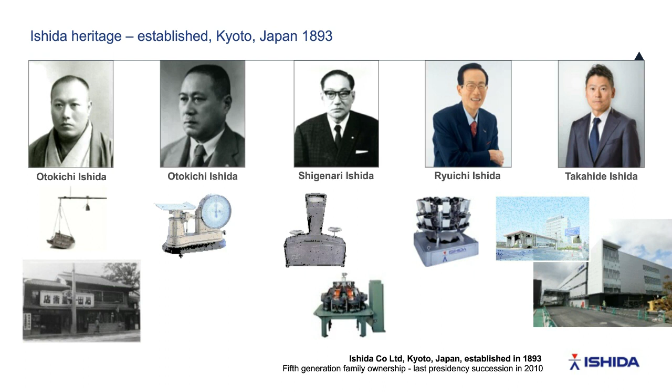Moving on, considering our presence in Europe, Ishida Europe was formed in 1985 as a hub for the Ishida business in Europe, the Middle East and Africa. We've also progressed into manufacture, and since 1995, about 60% of the machines sold by Ishida Europe within the EMEA region are manufactured in Birmingham in the UK. Just to show the size of the organization, in March 2019, we had 612 staff across the EMEA region.

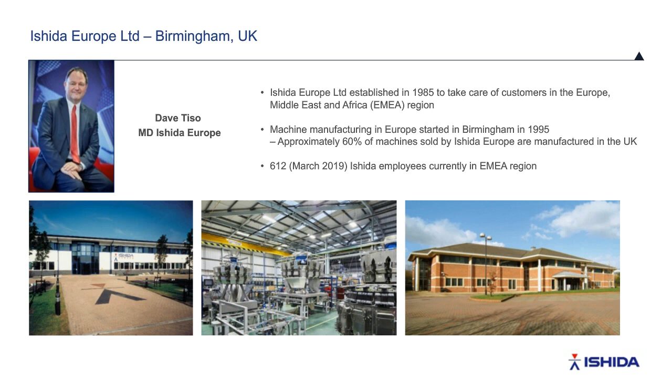Having provided a very quick overview of the company, let's start to talk about the key themes of today. In the confectionery sector, it's now highly industrialized, and there are demands for higher speeds, higher efficiencies, and higher accuracies. My colleagues will talk about a variety of concepts around that as we move forward. Clearly, all of those involved want to make sure their giveaway is reduced, they're extracting the maximum product throughput from any factory footprint, ensuring their plants are providing weight compliance, and key is food safety as we move forward, so we need to ensure there's no contamination within the finished product.

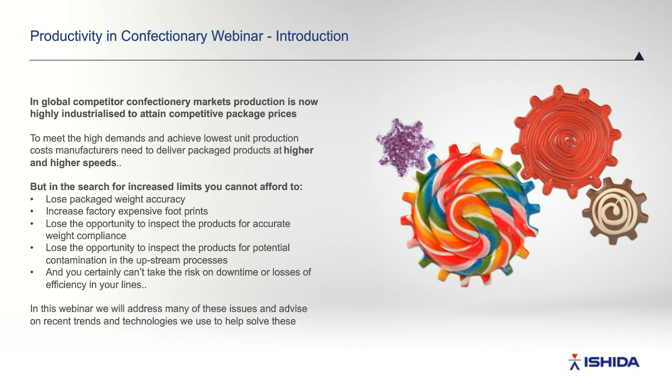Thank you, Steve. Good morning, everyone. My name is Ian Atkinson, and I'm Business Manager for Multihead Weighers here at Ishida. What this means in the Ishida language is I live and breathe the multi-head weighing applications, the customer challenges that you face, and of course the solutions that we devise for you.

During my section, I'm going to talk to you about industrial weighing in some of the more challenging confectionery applications. It's only a short slot, so I would welcome you to engage with us after the event if we want to go into more specifics, especially around your challenges.

As Steve said, we developed the first multi-head weigher back in the early 1970s, but since then we've continuously invested in our designs and technology. While we've expanded our range to over 500 models now, always increasing speeds and giving you more configurations for more different challenges, the one thing we've never lost focus on is our accuracy. And that brings us to our theme for today, which is high productivity without compromising.

We deal with many different applications across our company worldwide—fresh, frozen, and dry sectors across Ishida—and all of the challenges and product characteristics involved can actually be seen in confectionery.

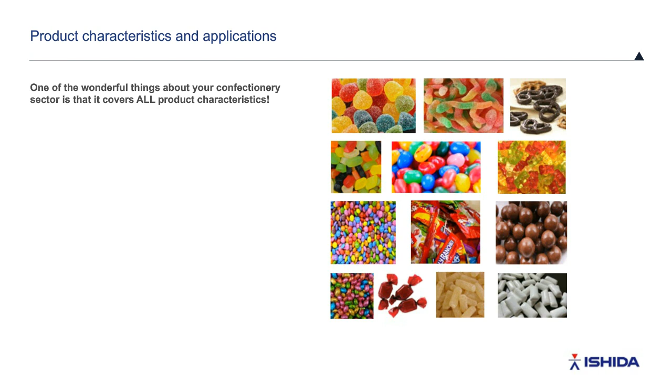One of the wonderful things about your sector is you've got just about every challenge we face. As you can see in the images, there's an example of sugared confectionery—sugar is a challenge with abrasion and potentially getting into seals, something we need to manage together. You've also got examples of tangling products.

You've got examples of fragile chocolate-coated products. The chocolate coating can also be an issue when ambient temperatures change, which will change the flow characteristics.

You've got free-flowing confectionery, oiled, sticky jelly confectionery which can be clumpy as it arrives at the top of the machine, and even products in bag.

We may provide a solution with accurate combination weighing, with small micro packs going into packs, then transferred around to another weigher which weighs those mini packs into a bag—effectively becoming its own product in its own right.

You've got the example of the chocolate balls—they're very, very free-flowing. The challenge there is actually to slow them down so you can control them.

Then you've got the example of the coloured wrapped candies, which could be an example of mixed weighing, where you may want to mix guaranteed percentages of colours within the consumer's pack.

You've also got examples of wrapped candies—that could be an example of low piece counts, or even single piece counts with guaranteed single piece counts, which is another solution we can provide.

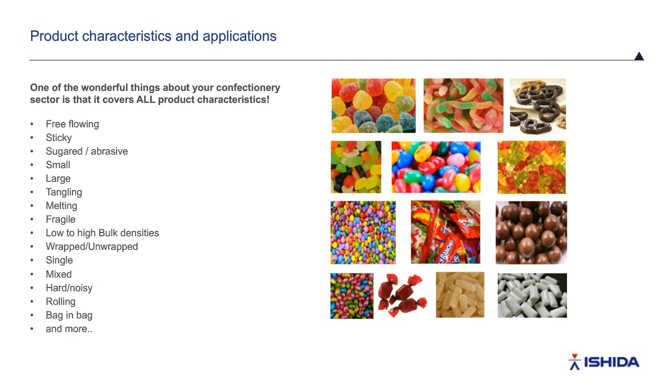In order to ensure we can tune our industrial weighing solution to exactly match your needs, we need to spend time to really understand your business.

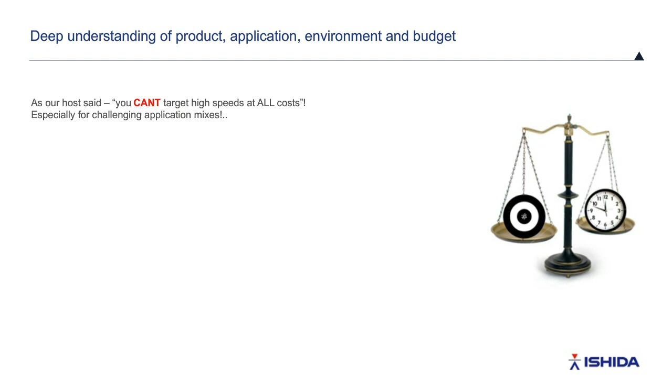As our host Steve said, you can't target high speeds at all costs, especially for challenging application mixes. So all of our Ishida sales consultants and engineers actually spend a huge amount of time with you up front before just arriving and trying to give you a quote. We won't arrive with a quote, we won't arrive just trying to compete on price—we will actually want to deeply understand your business.

We've already touched on product characteristics, but it's worth mentioning we need to understand not just what the products are like in pack, in the supermarket environment, but also exactly how they arrive at the top of the industrial weigher in your exact production condition.

What are the different target weights and speeds? More specifically, we need to understand exactly the speed requirement you need for each target weight of that product—not just a generic speed. We really want to understand it deeply.

Within that range, we also want to understand what's the highest percentage of your production, so that we can have a level of prioritization in devising our solution.

Of course, it's very rare you're only doing one product. The likelihood is you'll be doing many, many products on your industrial weighers, whether you're a small, medium or large manufacturer, or a contract packer for the large supermarket chains.

Based on the multiple products, we'd want to understand with you what's the highest percentage of production so we can prioritize. Also, what are your future plans in years to come? Because we'd expect with an Ishida machine that you should be running it for at least 15 plus years.

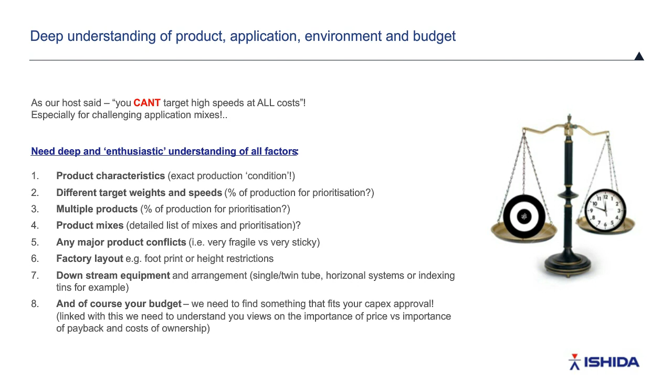Now, what I'd like to do is move on to the confectionery weighing challenges. So I've got a selection of really high-end challenges. I'd like to share these high-performance examples with you.

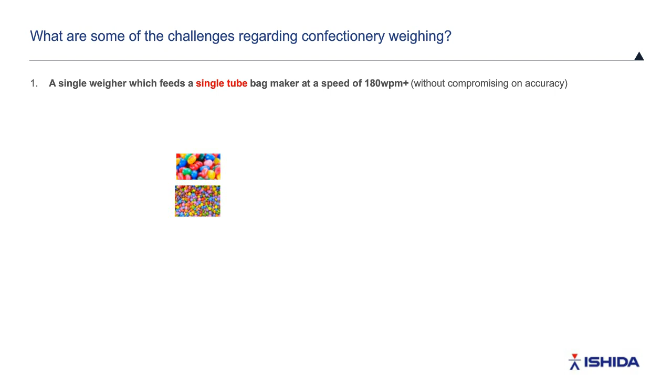So the first one I'd like to look at is how do you solve really high-speed, accurate weighing into a single tube vertical bag maker with up to 180, perhaps even plus weighs per minute. We would typically have two options to consider with you. The first option is to split a machine into effectively 2 combination weighers feeding each side of a high-speed Ishida single twin timing hopper. This could be a mid-range machine because we're spreading the combination weights across each side of the weigher.

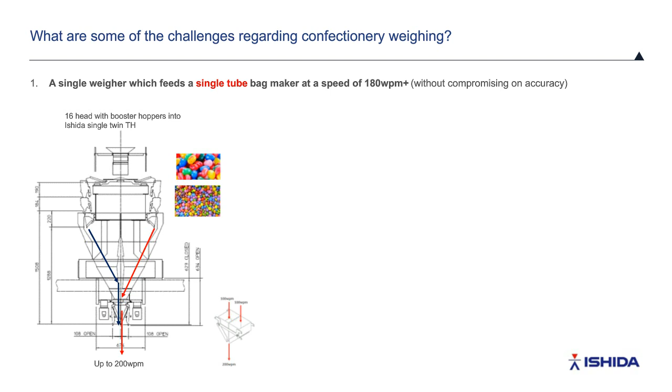Each side would make a combination very accurately, dropping that charge of product into one side of the single twin timing hopper, slightly out of phase with the other side. So there's a very short drop distance and drop time between each transition into each side of that high-speed timing hopper. With this configuration, you could have up to 200 weighs per minute going into a very high-speed vertical bag maker below.

The alternative, particularly if you have more compact factory spaces, is to have one of our premium top-of-the-range machine solutions running at very high speeds, a 14-head machine making combinations from those 14 heads, typically dropping from 4 weigh hoppers, straight into a high-speed chute and down through an Ishida Iris timing hopper, which opens very quickly. This can run up to 180 weighs per minute. We supply both of these solutions into really high-end, high-speed single-tube applications.

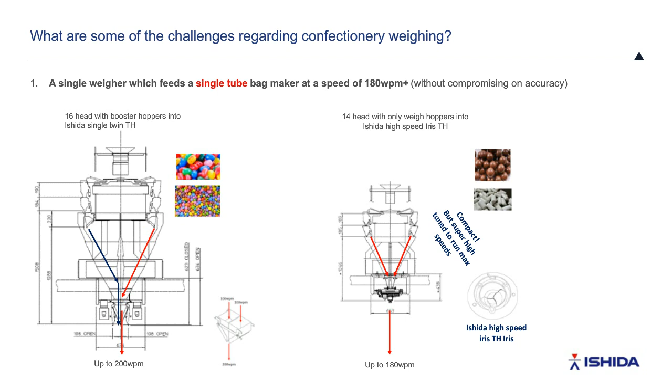So another challenge is to look at how can we provide a solution for very high speed into twin-tube vertical bag makers? In this case, up to 400 weighs per minute, again, without compromising on weighing accuracy.

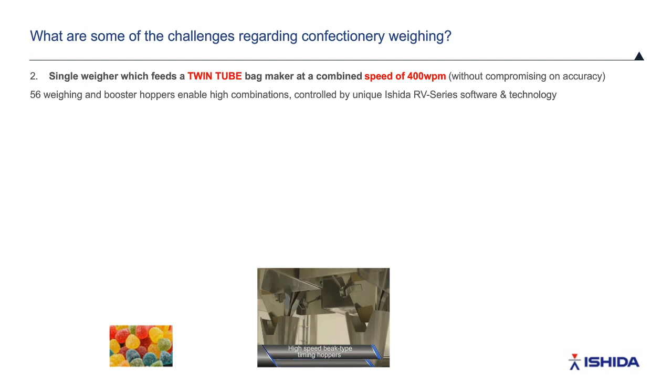Our solution would be to provide a 28-head machine split into 4 sections. Because it's split into different sections, this machine would also have booster hoppers to aid in providing you with the maximum number of combinations, so not compromising on accuracy.

So we consider how can we optimize the flight of that product. This configuration is super high speed. It goes from pool hopper, weigh hopper, booster hopper, single opening, and we direct the product down a high-speed chute so it barely touches the side. There's no swirling, no bounce, and it's transferred in the optimum style and shape.

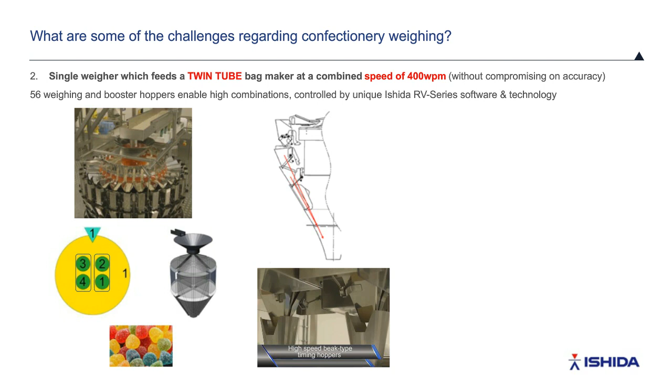As you can see, this then delivers up to 100 weighs per minute per section, going into each side of the high-speed single twin timing hopper, delivering you up to 200 weighs per minute per tube. And we have got successful installations delivering product accurately weighed at these very high speeds.

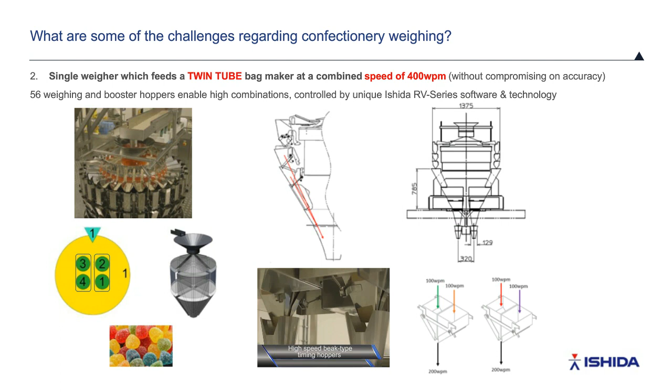So how do we weigh at high speeds without breaking fragile products? Another one of the challenges and paradoxes that we have to face. So with very fragile confectionery products, we need to still give you a productive throughput, but avoid that product breakage so that your consumers open that pack and can recognize that product, not just end up with broken pieces.

What we do is we consider every transition point through the weigher, and it starts right at the top. We have a low drop height, specially designed low height inlet chute, dropping onto a dispersion table at the top, which is actually coated in urethane coating, providing a cushioning benefit to avoid breakage at that first transition.

That then vibrates in a controlled fashion, feeding product onto individual radial feeders, which are cleverly shaped to minimize breakage. They also have liners on there, and then a waterfall end which gently trickles that product into the pool hopper.

We can offer this either in our entry or mid-range level, but in our premium range we also offer special curved hoppers which specifically control the deceleration of the product as it transitions into each hopper.

Those double opening curved hoppers then transfer from the pool hopper, the weigh hopper, down into a very shallow discharge chute, again which is lined.

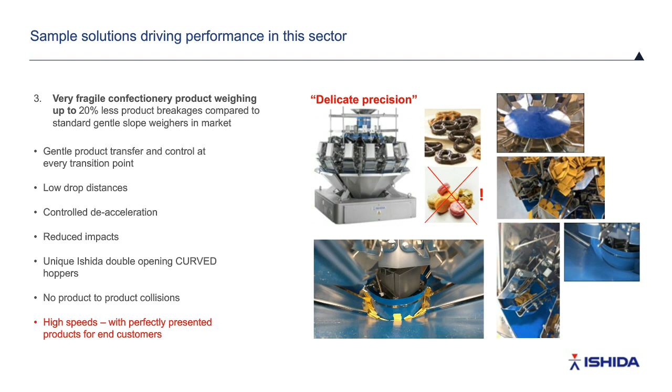So how do we overcome the mixing challenge, now a common theme and a common requirement in confectionery?

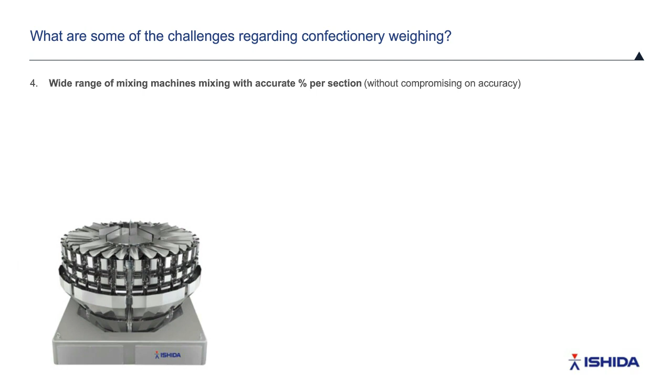We can offer you mixes of 2 mix right up to 8 mix with very accurate guaranteed percentages per section. When mixing, each section is working as an independent weigher, so you have to have the number of heads available and the configuration and design available for each of the product characteristics in each of those sections.

Our focus is always to deliver the best combination weighing, and so we can actually have many different section splits across our mid-range or our premium range solutions.

As we have 500 models available, we can also select, match, and specifically tune to your different requirements and application needs. Here's an example of a 2-mix machine split evenly based on products with similar characteristics.

We could then have a 3-mix, and in this case, section 1 has more heads than section 2 and 3. So that, for example, may be applied to a more challenging product where it's more difficult to make quick combinations.

Here's another 3-mix where you may have 3 similar characteristics of the product, and this allows for that combination and an equal distribution.

4-mix, 5-mix, again with different head splits. This is just to show you an example. 6-mix, and then moving all the way up to 8-mix with our 32 head.

Typically, we would say a minimum number of heads per section is 4 heads per section, again with a booster hopper to enable you to make the required number of combinations.

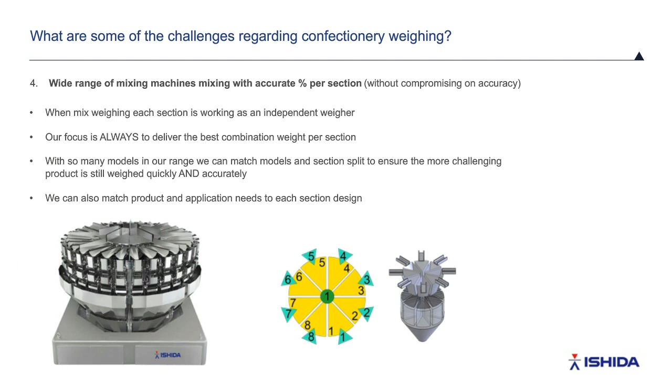Now, last but not least, I wanted to highlight something particularly in vogue in the confectionery industry, and something we've seen a lot in recent years, and this is the sugar challenge, something we've been very much working on for the last 12 months.

Now, sugared product is a challenge. It's abrasive. As the product is transferred, it's energized, and that loosens the sugar from the product, and it then is traveling down through the machine.

Excess sugar around the product then risks contaminating the packaging seal, so not good - pinholes in the seal, air leakage, and of course potentially spoiling of the product.

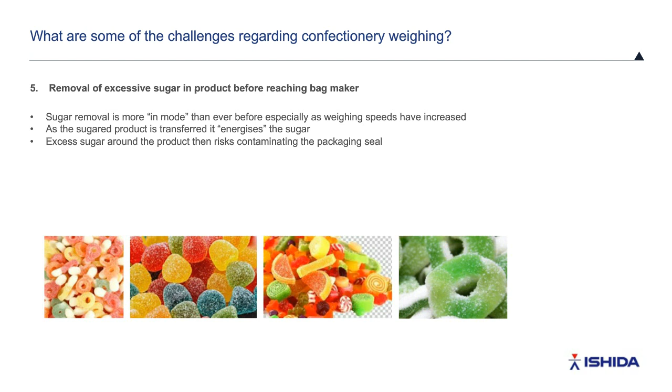Now, Ishida has added to our sugar extraction solutions, and we have an all-new on-machine extraction design, which greatly reduces sugar removal before being weighed. We've been busy over the last 12 months testing this, and we're delighted with the results.

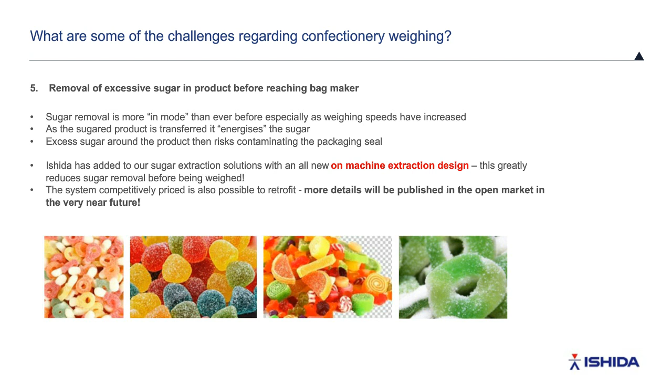All I wanted to do today is just highlight this is now in existence, and we will be launching this to the open market in the very near future. So if you have weighing applications of sugared product, we look forward to talking to you and discussing our solution, which is

actually also very competitive and cost effective in the market. So apologies, I've just gone back a slide.

So just to close, from a weighing perspective, I just wanted to emphasize again that our focus is always on delivering maximum accuracy and yields, but as well as productivity.

So we never lose focus of the need to provide combination weighing, which is our true specialty.

We don't get into dosing. We're the world's specialists in combination weighing. Dosing for us is actually a compromise.

So the things we've just discussed are really just a few, and certainly we do want to get into more specifics with you, so please do contact us.

Our broad range of approximately 500 different multi-head variants can be adapted further to tune our solution for you. So 500 models, up to 150 different options per model.

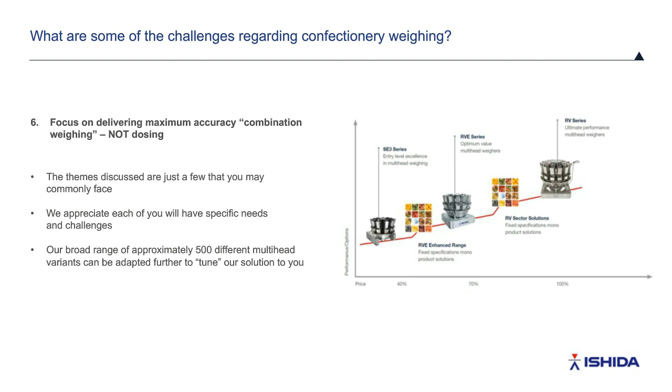We ensure you receive rapid payback and years of low-cost operations with the highest possible yields. Challenge us as the market leader in your production challenge. We'd love to listen to you, and we'd love to combine our knowledge with yours. And we look forward to having more contact with you. Thank you for taking the time to listen.

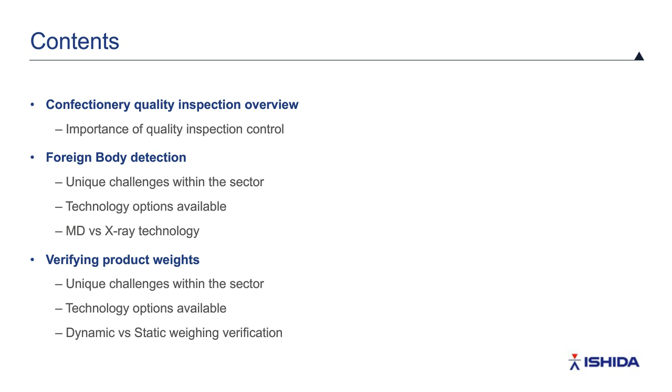So first up, as a confectionery producer, why would I be interested in investing in quality inspection control equipment? Well, one of the foremost, probably front and center, is brand protection. Brand is very important in differentiating yourself in the market, and it can also be damaged very rapidly.

If we go back 15, 20 years, if there was a particular quality issue with a customer, you might end up with a customer complaint coming back, and it might influence the friends and colleagues of that individual not to purchase your brand going forward. Nowadays, with the rise of social media, any particular quality issue with a brand can be spread very, very quickly.

So it's very easy to damage brands in the market when you have a quality issue. Also, a very hot topic at the moment is food safety, and that could be to do with allergens, or hard physical contaminants coming into the products themselves. So that's another important reason why you would invest in quality inspection control.

The other benefits are largely on the financial side. From a confectionery producer, or in the food sector in general, product recalls, if required, can be extremely expensive. It might not just be the recalling of a batch that you need to rework, there could be fines involved too. So it's a very costly activity, and that's why quality inspection control techniques give financial benefits.

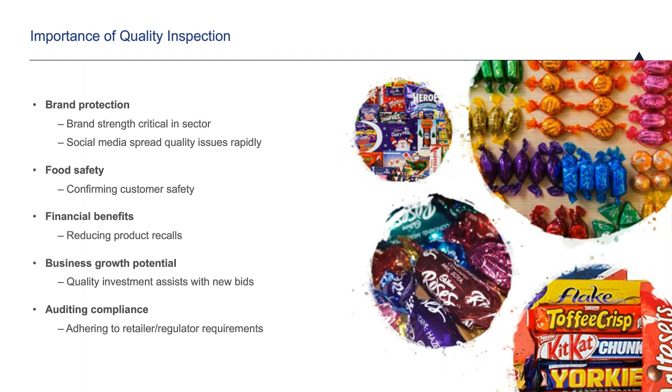So let's actually look at foreign body detection. First up, from a confectionery sector, we need to look at some of the challenges you might have in the confectionery arena. Most notable, as highlighted by Ian on the weighing side as well, is you deal with a wide range of products which can be complex in nature. Different materials, particularly nuts and chocolates, can cause certain problems for certain foreign body detection techniques. On the application side, you've got anything from low to high speeds.

And when it gets to the higher speeds, that can cause issues in actually rejecting products, and that needs to be considered a bit of a challenge as well. The products themselves can also be small products, and they can also be lightweight.

When you're talking about some of the technologies that might be used, say X-ray technology, it typically comes with tungsten curtains. Low-weight products can be a bit of a challenge to get through tungsten curtains.

You also might want to consider in your regime product quality issues, so you might want to look at whether your products are damaged or whether they're missing items. Missing items might be whether it be a box of chocolates, or it might be something to do with a gift in a chocolate egg. You might actually want to consider that as part of your regime.

The final activity that is a bit of a challenge in the sector is the packaging which is used. Classically, a lot of metal foil is used, and that gives a nice freshness and a nice consumer interaction, but it can cause real problems if you're trying to use something like metal detectors for your foreign body detection.

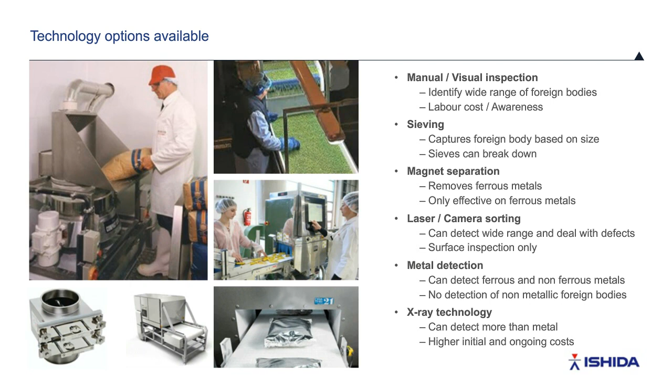Having said that metal detectors and X-ray technology are probably two of the most popular in the confectionery arena, it'd be nice to look in a bit more detail at the benefits and weaknesses of the two different technologies, and why you might consider them in the confectionery sector.

On the metal detector side, benefits are it's a cost-effective solution for foreign body contamination. It's also a simple technology, relatively easy to install, and easy for your operators to get up to speed on. It typically also offers compact solutions in the market, so those are the kind of benefits you can get with metal detectors.

On the weakness side, it can only detect metal contaminants. You also have to be aware that metal detectors can be prone to environmental factors, so any kind of vibration can impact on your metal detector. You also need to consider metal-free zones around your metal detector, and any moisture in the actual product can cause issues around sensitivity. The other challenge is packaging: if you use metal foil, metal detectors are not really a suitable technique for your particular confectionery products.

If you look at X-ray technology, it can detect a wide range of foreign bodies, so it can go beyond metal. The rule of thumb we use is typically anything with a density greater than water, which is 1 gram per centimeter cubed, X-ray technology can pick up. It can also deal with a wide range of different packaging types, including metal foils, and it can offer functionality beyond just foreign body detection, picking up product defects, missing items, and assisting with weight estimation.

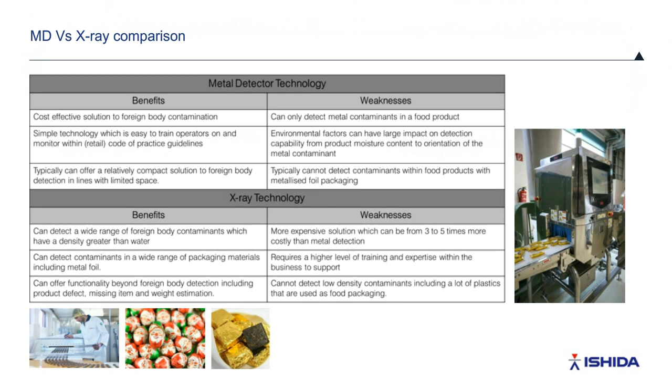What I'd now like to move on to is actually talking about verifying product weights. Apologies, we seem to have a slide that popped up slightly out of sequence. So if I go through verifying product weights, the first thing I'd like to talk about is some of the challenges which we have in the sector.

From a weighing perspective, high speed is a real challenge. When you start to get up to around 200 packs per minute or beyond, that becomes a bit of a challenge. You also need to consider that you typically have small products with low weights requiring high accuracies, which places certain criteria on the load cell technology and what weighing technique you might use.

You also need to consider the transfer between conveyors. A classic dynamic check weigher system would have an in-feed, a weigh cell, and a reject mechanism. Really, the transference between the in-feed and the weigh cell is the one that causes issues, and you need to be concerned about the size of your product and achieving accurate weights.

I mentioned rejection. When it comes to high speeds, you need to consider suitable rejects that can deal with those speeds. You might also want to consider fragile products - these are probably not something you want to reject with a pusher mechanism or a heavy-duty air blast, so you might want different reject mechanisms.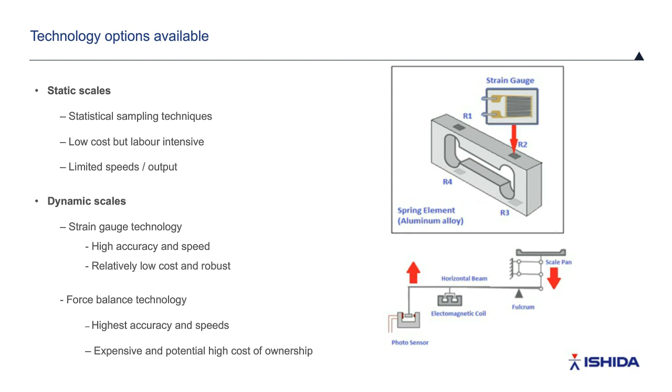So having covered some of the challenges in weighing, some of the techniques that you can use for actually weighing your products, I'd now like to cover standardization and regulations in the marketplace around confectionery products.

Everything to do with product weighing is overseen by Weights and Measures compliance. So all the standards in the static and dynamic weighing arena are overseen by that compliance in the European Union. Sitting below that, non-UK EU countries operate under a principle called MID, Measuring Instruments Directive, on their dynamic check weighers, while the UK has opted out of MID and operates under weights and measures. What does that mean to me as a confectionery producer?

If I'm operating a dynamic check weigher with MID compliance, say I'm in the Netherlands, France, or Germany, what I need to do to be MID compliant is get a machine which has been type approved. The dynamic check weigher will be type approved by the manufacturer, but that's actually done by an independent body. So it will be type approved by the likes of NMO in the UK, NMI in the Netherlands, or PTB in Germany.

That determines on the check weigher the weight bands and the maximum speeds that I can operate at. When that dynamic check weigher is installed at site, its performance is verified and it's sealed at installation. That means the load cell can't be changed or swapped out, and the software can't be changed either without breaking that seal. Once you've got a type-approved machine that's been sealed at site, you can use that dynamic check weigher for e-marking weight regulations.

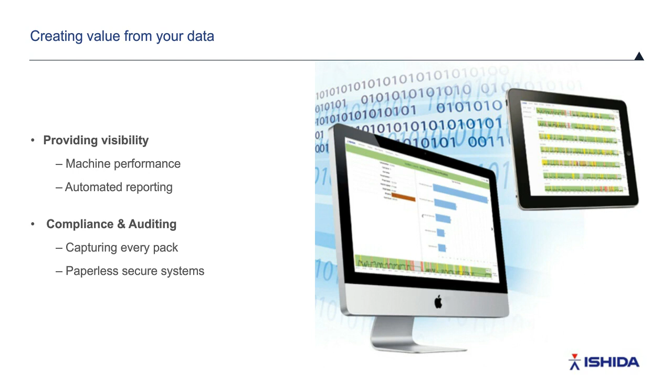As raised by Kieran previously, meeting compliance and auditing is essential today to prove to your end user and retailers that you are adhering to the policies they've put in place. This could be legal or contractually binding agreements. By capturing individual pack information and providing paperless reporting, this can be achieved locally using systems such as the IDCS system from Ishida, which provides individual pack data captured on one of our checkweighers. This helps ensure integrity in meeting compliance obligations and protects your brand in the event of any product recall.

Moving on, increasing your uptime, as I mentioned earlier, is a key benefit, as well as supporting your manufacturing operations with rapid and accurate production and compliance information. Capturing performance data at the individual machine level and across the whole production line can offer further significant benefits. Machine uptime is a fantastic benefit you can gain here from capturing that data.

This can give you either immediate insight on the shop floor for self-improvement, using your own on-site maintenance teams to take prompts from the software, or by accessing 24/7 remote expert support from the OEM. This can be done from Ishida with our Sentinel system, which provides remote analytics on the machine and allows us to support in a very rapid period of time. Both approaches can dramatically reduce your mean time to repair and the associated cost of ownership by minimising or even eliminating unplanned downtime.

I mentioned earlier as well, increasing your OEE. The high-speed nature of the confectionery sector and increased pressure on material cost ensures OEE is as important a metric now as it has ever been. Capturing live OEE data offers immediate insight, and in addition, the latest Ishida developments involve analytics on that data, meaning we can start to provide real-time guidance to your operators, ensuring they can take immediate action for improvement of performance.

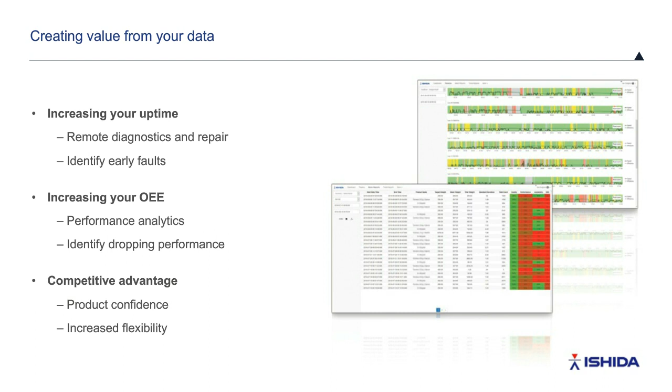Now, the final point I'd like to discuss today is really starting to look at the connectivity and security issues that you have with your...

Sorry, I have a slight challenge with my screen. If one of my colleagues can push that slide forward for me. Or I'll continue with the content.

Connectivity and security is particularly important when it comes to data capture. Across many sectors, manufacturers are looking to utilise and capture that data and move towards becoming a smart factory. We know that the challenges around this are very much around getting machine connectivity, particularly with legacy equipment as well as new, but also ensuring security for the business and, most importantly, the consumer as well.

In our experience, these challenges are best met by following a common and approved approach to ensure you've got long-term integrity of your systems. And again, going back to the earlier point, being able to prove that you have that kind of level of integrity in your production environment as well.

A key method we employ for this is that we adhere to industrial standards such as IEC 62443, which is an industrial automation and control standard, particularly looking at cybersecurity and data risk. By following this standard, we can ensure our own systems monitor user access, how secure that system can be, whether it's password protected, ensuring data is stored appropriately, ensuring it's clear who owns that data, and making sure any transmission of information is fully encrypted at all times.